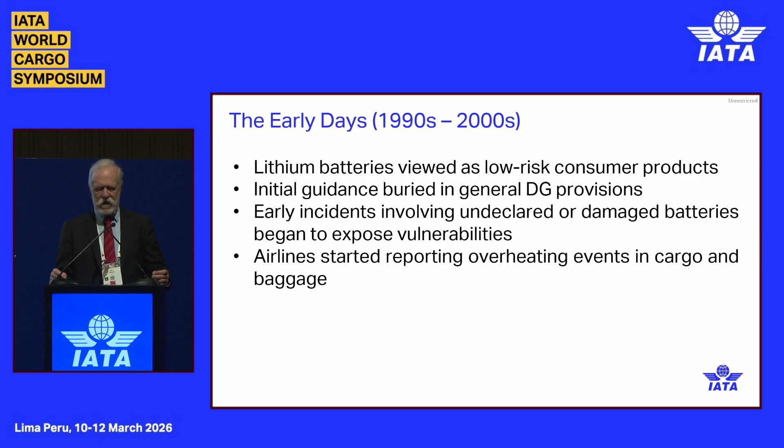But that didn't actually apply to batteries at that stage. 2003 was when we saw the UN 38.3 series of tests actually start coming in, and then we had 3 incidents in 2006.

So the first one was the UPS incident in Philadelphia, and I might take a little bit of revenge on Tim and ask him, when did he actually get involved with dangerous goods?

Good question. I was actually moved to the department, and I could not spell DG. I didn't even know that we moved hazmat, which we call that in the United States. And it was 3 weeks exactly before that incident in Philadelphia. I sat there and I was like, what have I done? So yeah, 3 weeks before that was my indoctrination into dangerous goods and batteries.

The story of that particular incident was the crew were airborne, coming up towards descent, and the flight engineer noticed there was a bit of a burning smell. That was the first indication. There was no fire warning, no smoke alert, just the crew smelt something burning. A few minutes later more of them started noticing it, so they pulled out the emergency codes, managed to land the aircraft, pulled up to the gate, evacuated, and fortunately they survived. But time from start of the fire to loss of the airframe was 23 minutes.

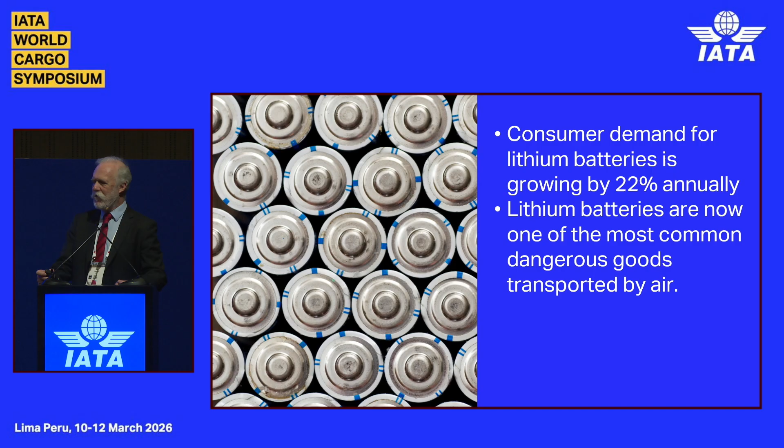Here's a few examples. And the first thing I'll say is, I'm not Trevor. I stepped into this at the last minute. Part of me stepping in at the last minute was I was actually hiking in the hills and had no reception, so I do have to thank my colleagues for putting the deck together for me.

But enough of the problems. I said I would talk about my first incident, and my first incident was one of these. Dave Brennan was actually working for the airline at the time that had the incident. So, small world.

1996. It was a delivery van, so the batteries had already flown from Perth to Sydney in Australia, put into the back of a van. The driver was taking them out to be delivered, and the back of the van started smoking.

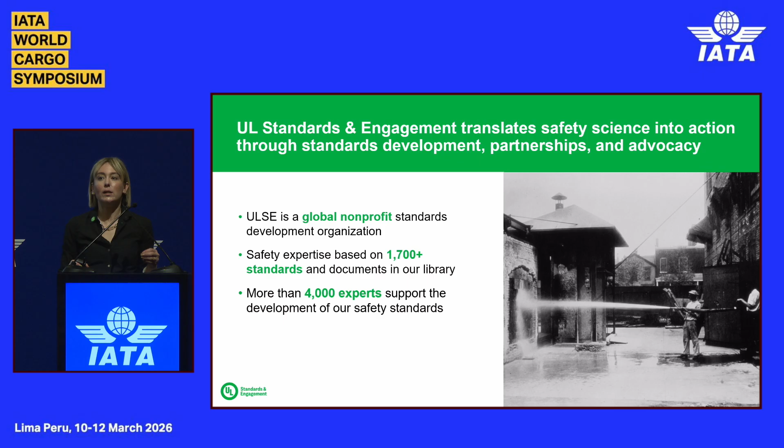So in order to investigate this issue more thoroughly, we took a mixed methods approach where we combined our TRIP incident data over the last 5 years with multiple touch points with those in the cargo aviation industry. This includes numerous operators, international regulators, representatives from the battery manufacturer industry, as well as shippers, where I think a lot of the risk is situated.

We tried to speak with both large-scale shippers as well as down to the individual drop shipper to get a sense of their understanding of batteries as a dangerous good. We also do tracking surveys on general public understanding of this risk, and we've incorporated some of that data into our report as well.

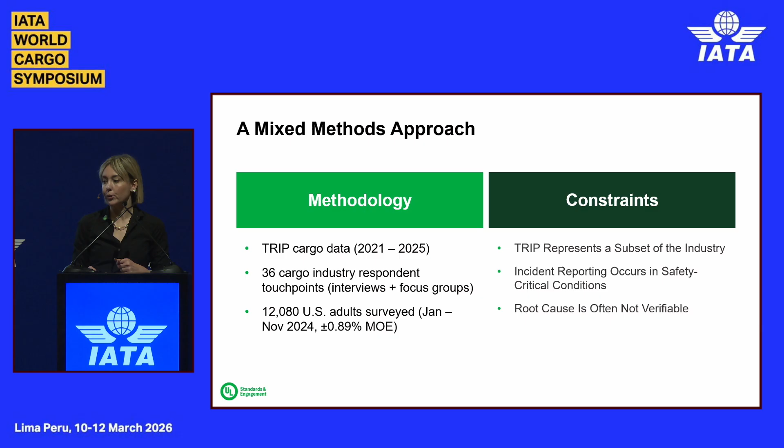There are 4 key takeaways I want to walk you through today. First, thermal runaway incidents in cargo continue to rise alongside rising consumer demand for battery-powered products. Second, battery quality and shipper behavior are the core drivers of risk within the supply chain. Third, geographic variation in oversight and approaches can add to this risk, a theme I've heard pretty consistently across this conference. And finally, the system is built on trust, but also on plausible deniability, meaning there's a lot of shifting accountability and responsibility for this risk.

Now, I'm going to walk you through each of these findings in a little more depth, and then end with a set of recommendations that I'd love to discuss as a group when we get to the questions later.

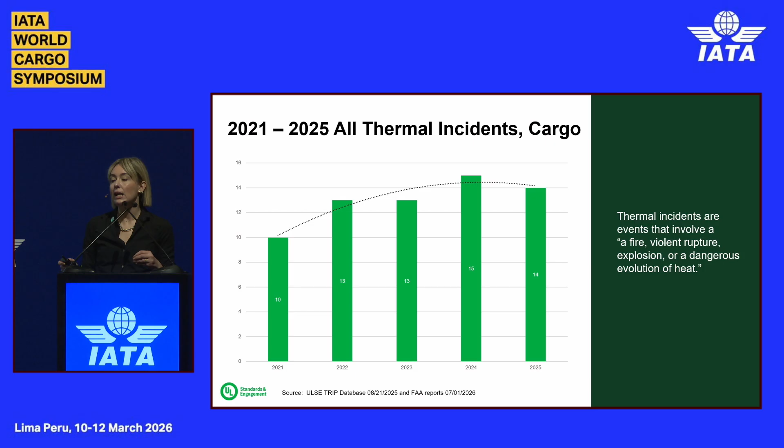Here's an overview of our cargo data from 2021 to 2025. We see broadly thermal runaway incidents are on the rise, and it's a relatively steady increase rather than episodic. This is important because we know operators are evolving their mitigations to this risk, and yet the risk is still rising. We think this is likely due to some underlying structural factors related to consumer behavior, which I'm going to talk about in a moment.

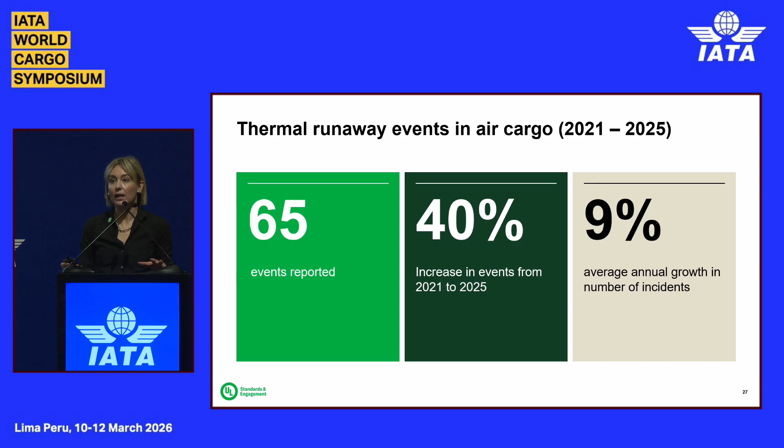First, I wanted to dig into this data a little more. We see there are 65 events reported between 2021 and 2025, with a 40% increase over that period, and a 9% average annual growth rate in incidents. To us, this is really concerning. Ben mentioned the Air Busan incident where they lost an aircraft, and we are hoping to prevent any further catastrophic events by supporting industry with this data.

So I mentioned that underlying structural factors is our hypothesis for why risk is continuing to increase, even though airlines are attending very strongly to this risk.

We see that there is rapidly growing consumer demand for battery-powered products. There's a proliferation of third parties across the board, including new manufacturers who are deviating from the larger scale manufacturing we see in larger brands, as well as freight forwarders and others moving these batteries through the supply chain.

More importantly, we see the rise of small sellers and shippers who are really unaware of the risk of this dangerous good. They're able to do this largely through e-commerce, through drop shipping, through opening small e-commerce shops, sourcing supplies around the world, and then shipping them to the consumer with very little knowledge in a lot of cases of what is actually the risk of this product.

Finally, because this is such a consumer-driven product, potentially in contrast to other dangerous goods, there are some cost compression factors across the supply chain. Particularly with these new entrants into the battery marketplace, we see people wanting to get things to customers as cheaply and as quickly as possible, and that can introduce risk when you have such a volatile product.

Now I want to talk about what we see as the core drivers of risk and where they're situated in the supply chain. When we talk to stakeholders across the board, regardless of what perspective they held, whether a battery manufacturer, a regulator, or an operator, they consistently identified two core drivers of risk.

The first is battery quality. And when I mean battery quality, I'm talking about everything from how the battery is manufactured, to the conditions in which it's manufactured, the testing it undergoes, whether or not it actually conforms to an international standard—either one of ours or from another standard development organization—whether the testing laboratory is even a registered and appropriate testing laboratory, and also where the battery is in its life cycle. So with older, used batteries, we have less sense of the battery health.

Then the other side of the coin that we heard consistently was shipper behavior—the extent to which people who are moving these batteries through the supply chain are actually in compliance with the current regulations. The regulations as they stand do spell out pretty explicitly that these batteries need to be declared, labeled, marked, and packaged appropriately.

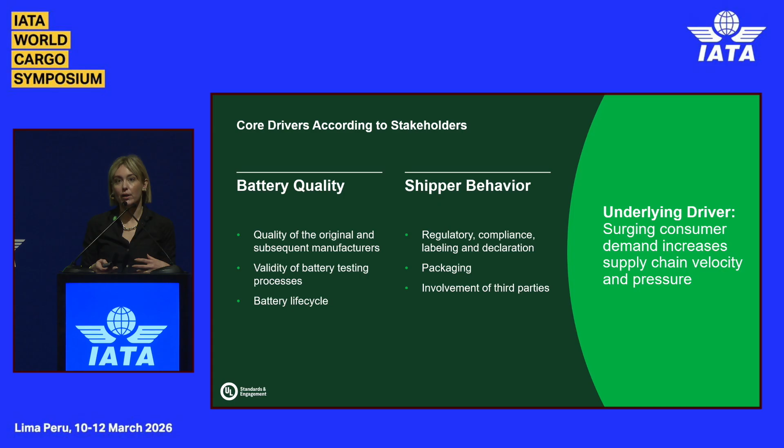But we see that shippers are operating across a very wide spectrum of compliance when it comes to these regulations. And again here, I just can't emphasize enough, this is so different from other dangerous goods in a lot of ways because of this consumer demand for the product and the entrance of all of these third parties into the supply chain.

I wanted to share two perspectives with you now—one from a regulator, one from a battery manufacturer. They're actually in agreement with each other, which did not happen often in my research. The regulator said there's a lot of trust—there always has been in dangerous goods—trust that everybody's doing what they're supposed to be doing.

But I think with these consumer products, the chances of things not being in compliance are greater than they were for things like chemicals that we traditionally shipped by air. So this regulator is again pointing out that consumer element of the issue.

I also want to put a pin in this notion of trust, and I'm going to return to that later in the conversation. We also heard from the battery manufacturer that in their perspective, consumer demand for the way that these products perform is also driving risk.

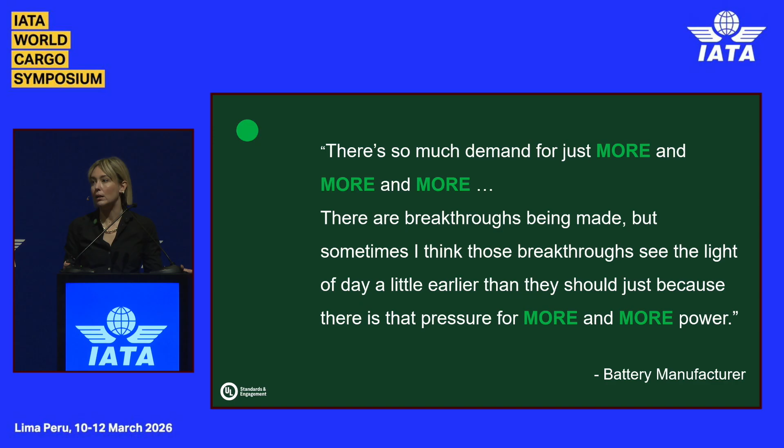They told us there's so much demand for just more and more and more. There are breakthroughs being made, but sometimes I think those breakthroughs see the light of day a little earlier than they should, just because there is that pressure for more and more power. So essentially, consumers want products that charge quickly, that last longer, that have more power, and manufacturers are trying to meet that demand, but not necessarily within the structure of standards and regulations.

So in the ideal state of the air cargo transportation process flow for lithium-ion batteries, we would have a pretty straightforward journey from the OEM to the end user. That would allow for opportunity for significant oversight that the OEM and any subsequent shippers are complying with all international regulations. It would also provide assurance to the end user that the product they're getting from across the world is going to be safe to have in their home or community.

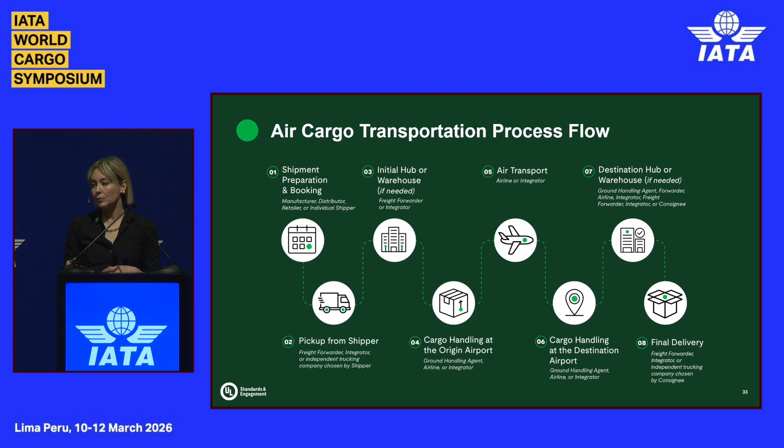That's actually not what is happening with lithium-ion batteries. It's really more like a pinball machine, I would say. They're just pinballing around the world, going from OEM to additional manufacturers to various distributors, through e-commerce sites to the consumers. A lot of times they're going back in the other direction too, when consumers are returning batteries, refurbishing them, and any number of other reasons.

So each of these lines with the arrows going in either direction represent the actual supply chain potentially, but we see that there's an opportunity to introduce risk at every point in the supply chain when it comes down to the quality of the battery, but also how the shipper has prepared that battery for shipment.

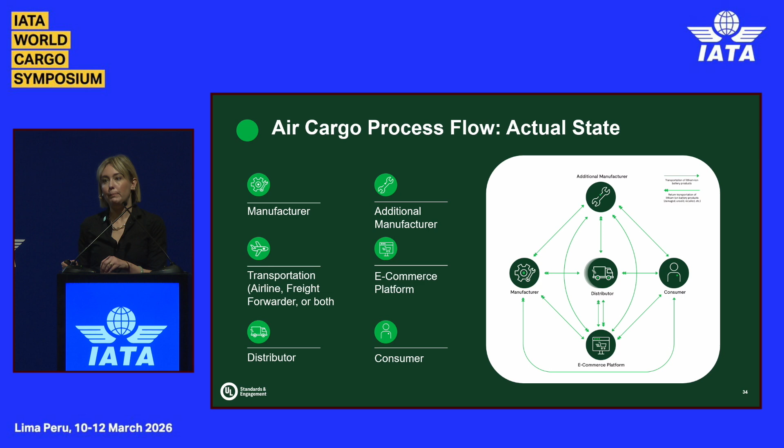We also heard very frequently that geography amplifies risk. So within TRIP we're able, when we have origin data, to track where these incidents are happening, where they are originating from the batteries themselves. We see that 42% of the incidents have origins in Asia - that's where we have the destination reported. More than half of the reported cargo incidents have their origin there. But Asia also accounts for the largest share of global volume of production of batteries, so we think the data is probably relatively normalized, although we haven't done that normalizing yet.

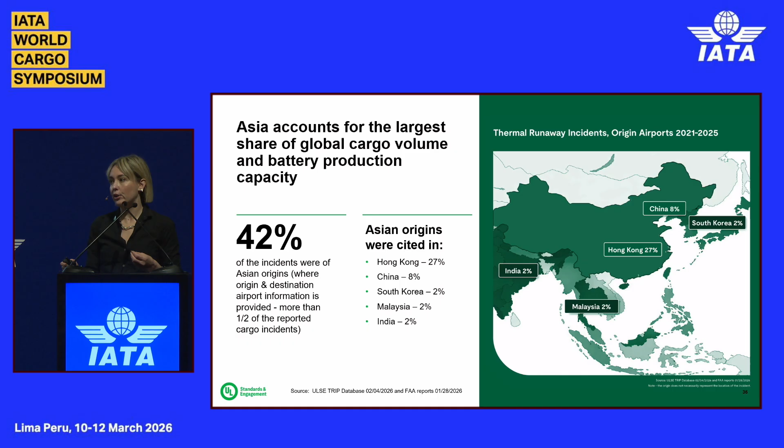So when I say that geography amplifies risk, what I'm not doing is talking about a particular state, a particular policy, or a particular approach. What I'm talking about, rather, is that the variation itself is what a lot of stakeholders perceive to be the risk driver.

Stakeholders identified three risks most frequently when I talked to them. The first was geography, the second was manufacturer credibility, so that's getting to the battery quality piece, and the third was mis- or undeclared batteries, which is getting to the shipper behavior piece.

I also was able to run correlations with how our stakeholders were talking about these risks. And we see that geography as a risk was highly correlated in their perspective with manufacturer credibility, third-party involvement, and misdeclaration. So essentially, they don't think that we're getting the same level of battery quality or declaration from all regions of the world.

We also saw that geography was correlated with some other topic areas separate from risk, in particular industry practices, oversight, enforcement, and regulations. So again here, and I think this is echoing something I've heard consistently this week, it's just differences in approach where risk is introduced rather than the approach itself.

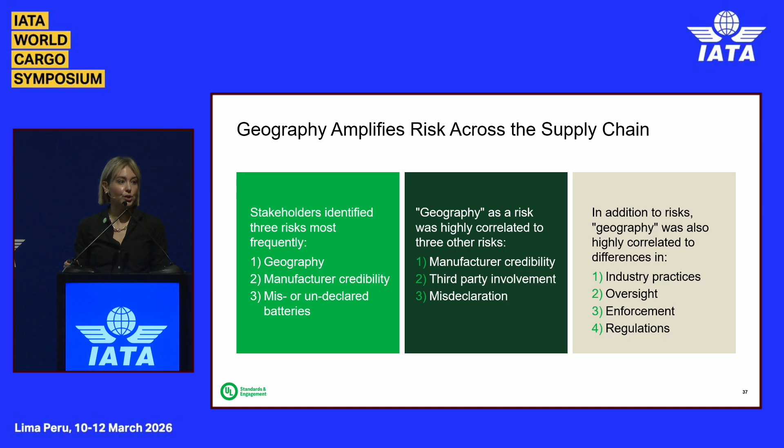The final key finding is around this idea of how the system is actually approaching oversight. So ultimately what we found is that the system relies on trust rather than verification when it comes to oversight and enforcement. In the shipping compliance and enforcement triangle, we have three key parties: regulators, operators, and shippers.

Regulators are, of course, responsible for creating the regulations and driving from the top down the way in which we can move batteries safely through the supply chain. Shippers are theoretically responsible for fully educating themselves and complying with these regulations, both in the state that they're based in as well as where they're moving the batteries to across the world.

Operators are the ones who are taking on the most risk because they are the ones actually loading these batteries onto planes. And so they are responsible for ensuring essentially that shippers are in compliance, as well as reporting non-compliance to regulators for possible enforcement.

What we heard pretty consistently across all the conversations is that there's relatively high confidence in oversight itself. I think that's due to the fact that oversight is perceived as a shared responsibility across this triangle, with no parties really feeling particularly solely responsible for it.

We heard, though, that in enforcement, there is significantly less confidence because people do not think that they're catching all of the non-compliance in the supply chain.

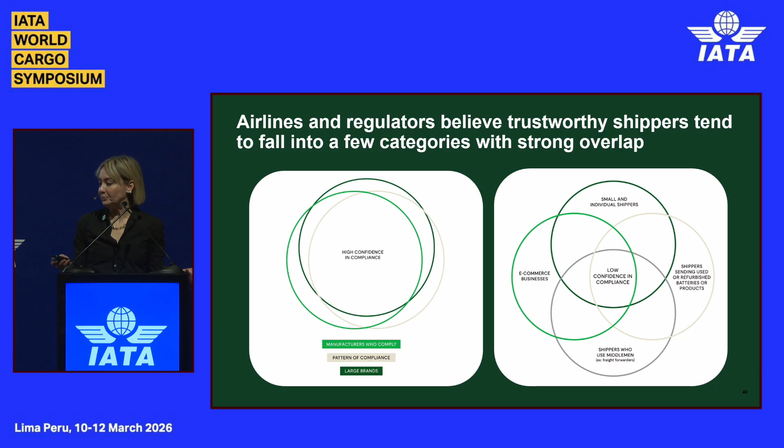On the flip side, there are four key areas that raise red flags for operators. The first is small and individual shippers, like drop shippers without a traditional dangerous goods background. The second is shippers selling through e-commerce platforms. Another is shippers using middlemen as they move product through the supply chain, creating that pinball effect of complicating the battery's journey. Finally, shippers moving used or refurbished batteries, simply because we don't know enough about the battery health.

In addition to airlines solving this problem individually around shipper surveillance, we also heard there was a lack of harmonization in other areas. Airlines told us: we know what we're doing, we're not sure what the person over there is doing, and ours is probably the best. So there's not harmonization, and not necessarily information sharing. We also heard there's not harmonization around fire containment certification approaches.

So essentially, how are we solving for this? What is the technologically safest response? We heard that there's really inconsistent training and oversight of shipper education around the globe, and inconsistencies in information sharing and best practices.

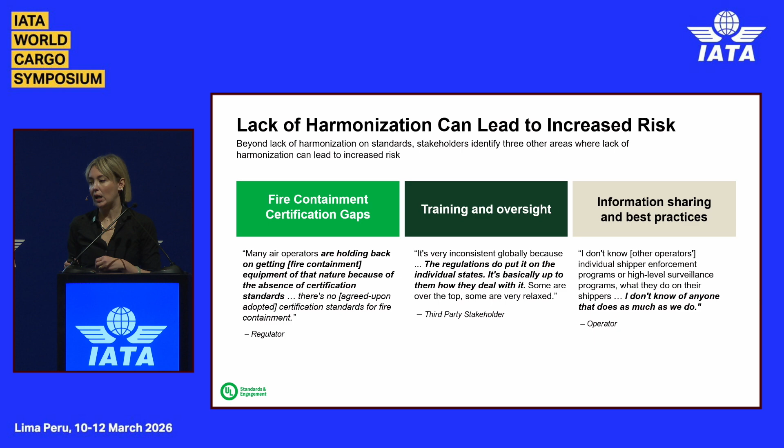As a standards development organization, we love harmonization—that's kind of our thing. So we have a number of standards, UL 1642, 2056, 2054, designed to keep these batteries safe through their entire life cycle, as they move through the supply chain and when they're with the end user in your home or community.

More recently, we've begun to develop standards for fire safety products in aviation. We have UL 5800, our standard for battery fire containment products. Many passenger airlines and some cargo operators use these for small-scale lithium-ion batteries in the cabin or flight deck. We're also now working on UL 5810, a standard for fire-resistant enclosures for lithium-ion batteries.

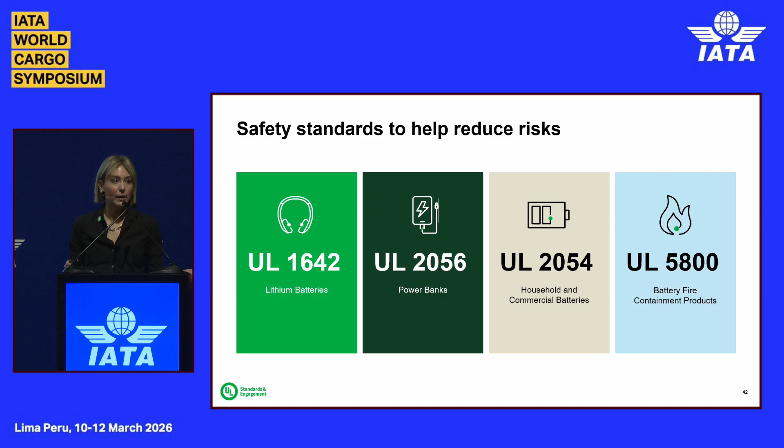I want to end with a set of recommendations that have emerged from these findings. The first is to establish clear, enforceable responsibility across the entire supply chain. This includes defining and enforcing accountability at each transfer point, reducing diffusion of responsibility across intermediaries, and attaching consistent consequences to non-compliance to eliminate plausible deniability.

I didn't have time to talk about this today, but we had some frankly frightening conversations with small US-based shippers. What we heard consistently, especially from drop shippers, was: if this package blows up, it's down to the manufacturer, it has nothing to do with me, I'm just importing it into this country. We have people importing batteries from manufacturers in Asia that arrive in compliance with regulations, then repackaging them in their own packaging that's no longer compliant because they have no idea what the regulations are. They don't think they're doing anything wrong, or that there's any responsibility for them at all.

The second recommendation is to strengthen education and global industry coordination: deliver simplified, accessible guidance tailored to small and third-party shippers, where we think a lot of this risk is situated; align oversight and inspection practices across modes and jurisdictions; and improve data sharing and visibility on shipper compliance history.

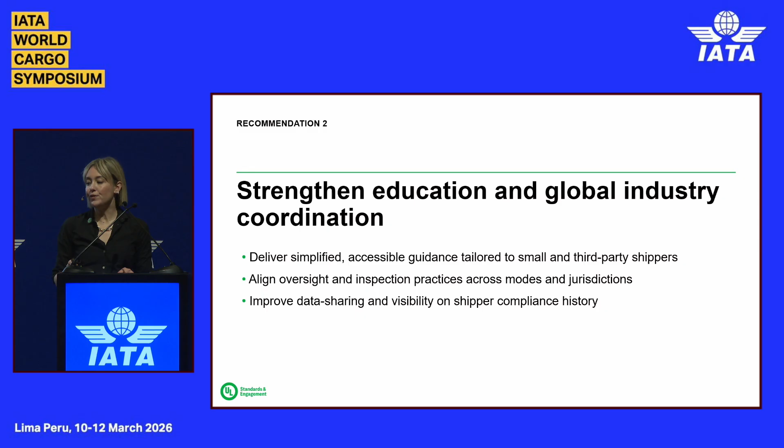Our final recommendation is to align cost and safety. What's interesting about this consumer-driven demand is that the cost and safety equation functions very differently for large brands than for small ones. Large brands see safety as highly tied to their reputation, so they often err on the side of safety at the expense of cost. On the flip side, these smaller brands are much less concerned with safety.

They're very concerned with cost because it's a highly competitive marketplace, and they want to undercut the other competitor. You can look on any e-commerce site and see the same product, probably manufactured in the same factory, being sold under multiple different names for slightly different prices, and all of those shippers are engaging in different shipping practices to get that product from its OEM to their end user.

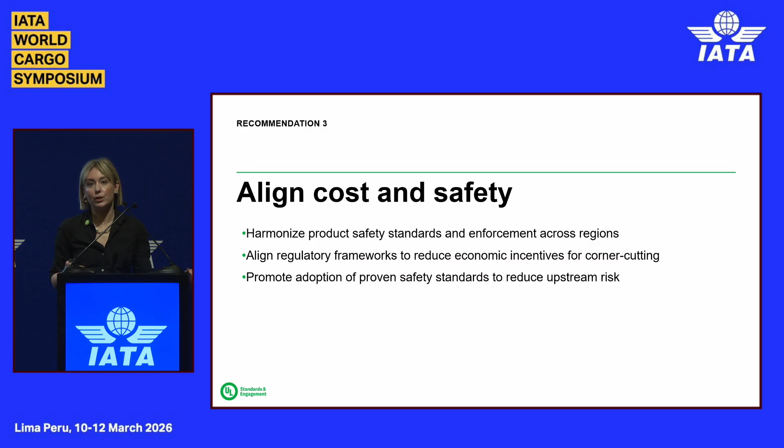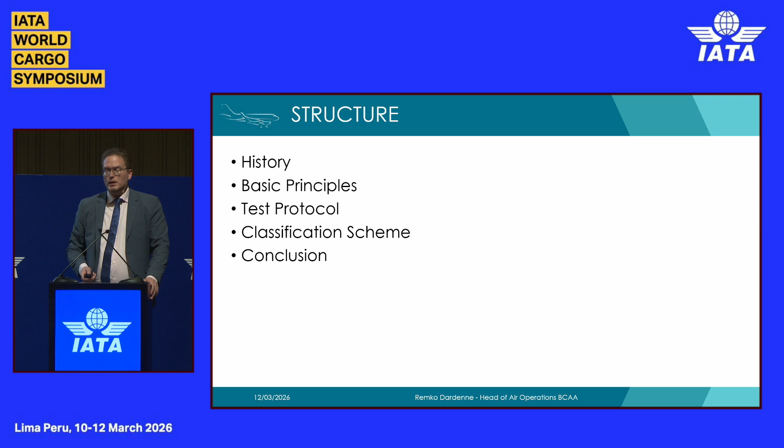Those who were yesterday at the cocktail hour in our session linked to the safety of the supply chain will have seen that I also gave a presentation on safety of the supply chain, where we discussed the definition of safety. I think it's important also to remember that all actions that Emily described, and that I will describe on new testing, are related to improving the safety of lithium batteries by air.

It might sound logical, but I think it's very important that we have this in mind, that it's not something that was invented to change something, to keep us at work, let's say. It's because incidents have occurred, and it has been seen that these new tests will probably improve safety for the transport of lithium batteries by air.

The incidents and accidents that occurred led to decisions by the ICAO Dangerous Goods Panel, or by ICAO in general, to ban certain shipments from air transport and to limit certain transports very strictly, having to have an approval or having to have more strict packaging and more strict conditions. Now, what you see on the screen are actually all the UN numbers that are linked to lithium-ion batteries, lithium metal batteries, and those contained in and packed with equipment.

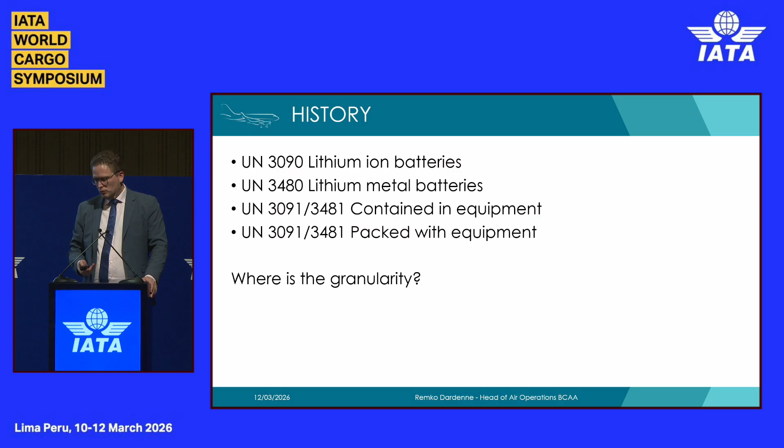Now, this was also already a request in 2016, so a long time ago, where the ICAO Dangerous Goods Panel actually requested the UN Subcommittee of Experts on the Transport of Dangerous Goods to start a working group with a mandate. You could ask the question, why is this going to the UN Subcommittee? It's because the classification of dangerous goods is done on a multimodal level, so it would not have made sense that ICAO had started it itself. It should have gone indeed to the UN Subcommittee.

So the mandate was pretty clear, but quite general: prepare a hazard-based system to classify lithium batteries for transport. And I want to note it's clearly a hazard-based system, linking it to the hazards of a particular battery. Determine the inherent hazards represented by lithium batteries and the types of reaction that may result, and also consider destructive testing.

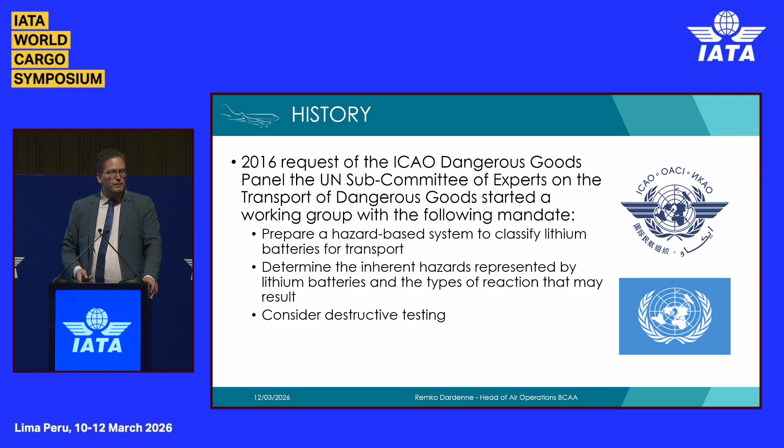Important to note, and I think that's also linked to the previous presentation, some sort of safety promotion is needed, or visibility, as it was said by somebody in the room.

It is important to note that currently there are clear requirements for the transport of lithium batteries. You cannot put any article on the market and transport it without fulfilling these requirements. So I highlighted a few of them.

The first one says it has to meet the requirements of each test of the UN Manual of Testing and Criteria, Part 3, subsection 38.3. I'll come back to that later, but Ben mentioned when this was introduced and that these tests exist.

Each battery needs to have a safety venting device or be designed to preclude a violent rupture. These are standard conditions that currently exist if you want to transport batteries. You have to have a means of preventing external short circuits, prevent dangerous reverse current flow, and then, most importantly, it has to be manufactured under a quality management program.

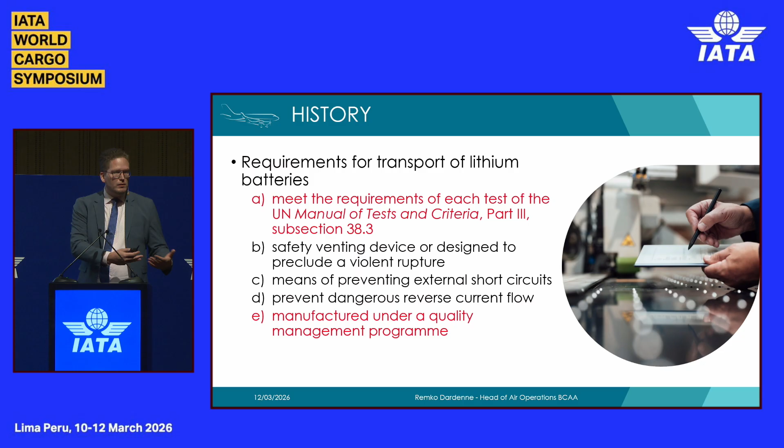If you do not fulfill these conditions, you are not transporting lithium batteries - that's how it's defined in the regulation. And of course, it must be manufactured under a quality management program. We could link this to oversight - what do regulators do to see if this quality management program actually exists?

So the 38.3 testing that already exists - I listed them here - are actually robustness tests, T1 to T8, just a code. I'll name a few: an altitude test, thermal test, shock test, a crush test, an overcharge test.

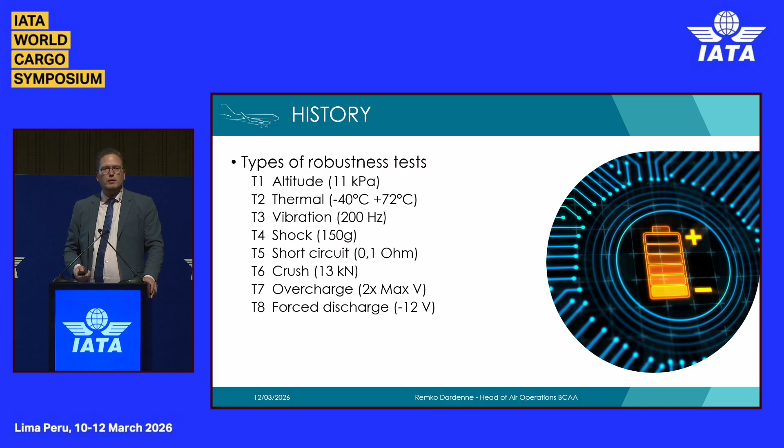These are quite severe tests that must be applied to lithium batteries before you can transport them. And to be clear, this is not only for air transport - this is needed multimodally before you transport batteries. So if anyone in the room thought there are currently no regulations or tests to be done, I hope I've convinced you this has existed for a long time in history, and if you fulfill these requirements, your batteries are considered safe for multimodal transport.

Now, going to the new classification scheme. Like I said, what was the issue? We could not make a distinction between the better batteries and the worse batteries.

Now, we all know that a reaction that occurs with lithium batteries is thermal runaway. So the idea was to look at a unique set of tests where you actually force lithium batteries into thermal runaway and see what happens, which means that if you look at the reaction, you can make a distinction between batteries that react very hard and those that do not react as much.

Another hazard is thermal runaway propagation - meaning if you have a battery that goes into thermal runaway, you put it next to another battery. And to be clear, when I say battery, it's also cells, but for ease of speaking I'll just use batteries. When you put them in a package and there is propagation, you could say that battery is less safe to transport than a battery where there's no propagation. If one battery goes into thermal runaway and it doesn't propagate to another, you could say those batteries are safer to transport.

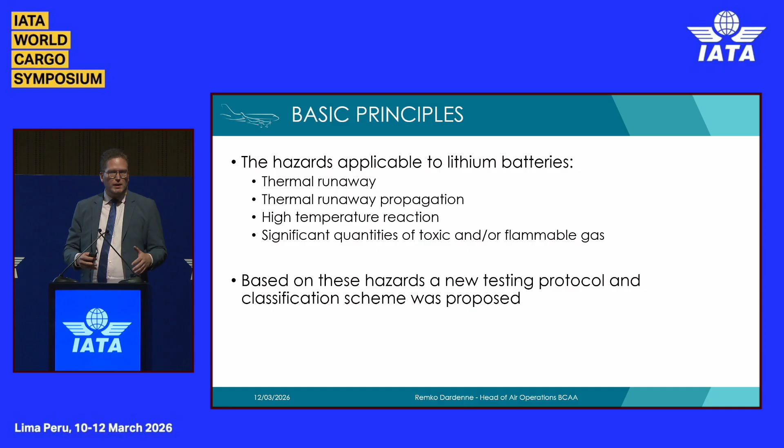Without going into too much technical detail, I'm going to describe the test protocol as briefly as possible, without all the parameters on temperature, etc. I won't talk about that because there are standard temperatures and pressures you need to have. So remember the tests I showed you, T1 to T8, the robustness tests - they still exist. We decided to name the new tests T9 and onward.

The testing based on failure is quite unique. Secondly, the tests that we saw from battery test institutes indicate what we already knew in air transport, that the state of charge has a big influence on how severe the reaction is of thermal runaway.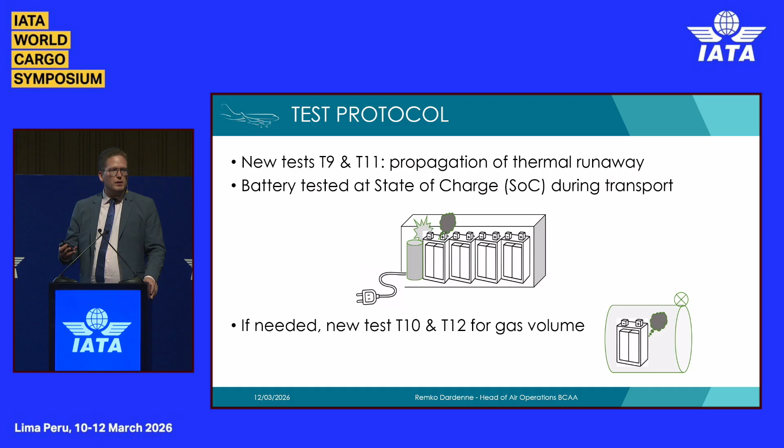The last bullet point is linked to the test for the gas volume, but I'm not going to go into detail about that. I think the first test, T9 and T11, which is for cells and for batteries, is the most important.

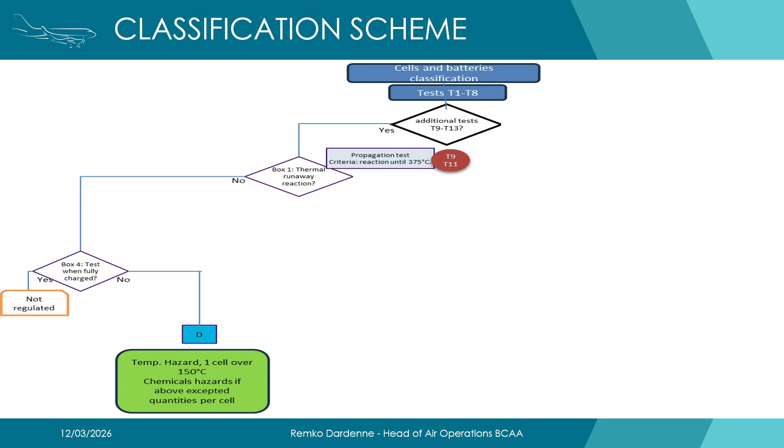What happens? You go to the box on the bottom left, and it says, have you tested your battery fully charged, so on 100% state of charge. If you did that, you applied the new test, forcing it into thermal runaway, and there was no reaction, then the working group decided that it would be a non-regulated battery because there is no hazard.

If you have tested it not on 100% state of charge, you will be seen as a battery that is less severe, has less reaction, and it will be a type D, meaning that you can apply less severe packaging for this battery.

Now, if we go to the decision box on thermal runaway, the test is being done. You see, you force the battery into thermal runaway. The next question is there propagation or not? Like I said, if there is propagation, you will end up with a type A, so the most severe battery to be transported, meaning also the most stringent packaging conditions you will have to apply.

Now, I already mentioned, if you do not have any propagation, it means that if there would be a thermal runaway, it would only be one battery in the full package that has a hazard. Then comes the flammable gas volume hazard into play, where, depending on the quantities, more than 25 liters, less than 0.25 liters, or between, you will have several types. Meaning, of course, if you have lots of volume of the flammable gas, you will be seen as a more severe battery and also have to apply more stringent conditions.

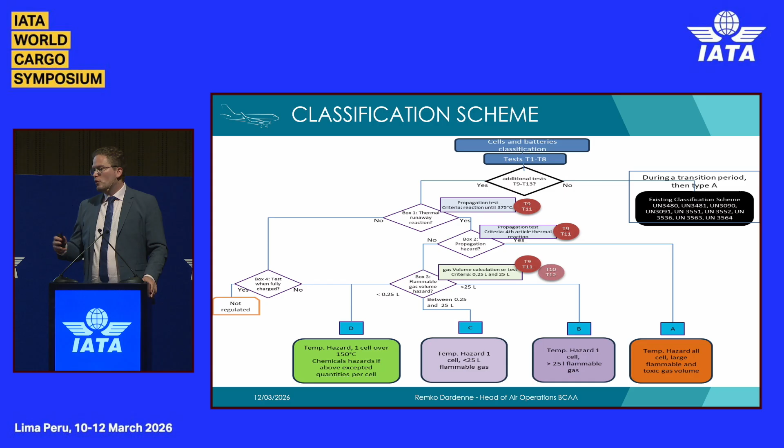And so actually, going through the scheme like this, we go back to the full scheme, and that's what I explained. So you go from the left side to a completely not regulated battery because if tested with the new tests, there is no thermal runaway, and you have tested on 100% state of charge, there is actually no risk in transport. And to the far right means if you test the battery with the new test, there is a thermal runaway, there is propagation, meaning you will have to apply more stringent packaging conditions.

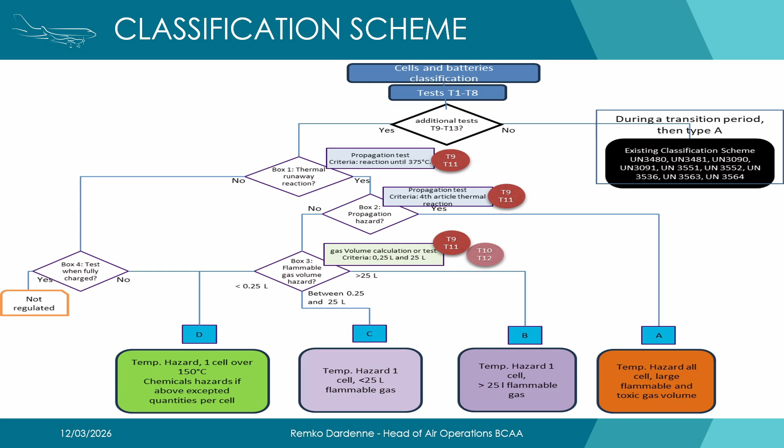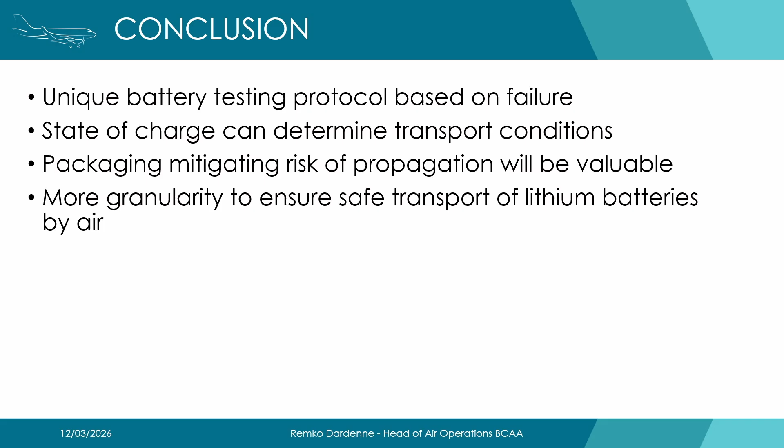It is quite a unique battery testing protocol based on failure. Secondly, the state of charge, which we already apply in air transport as a mitigating condition, is also now acknowledged on a multimodal level as a way to reduce the risk and as a way to classify your batteries as another type. And then, of course, it's part of the conclusion.

I didn't mention it in the presentation. When the new testing is actually looking at thermal runaway and propagation, if you are able to apply packaging that makes sure that you do not have propagation, you of course already eliminate a risk. So the packaging mitigation of propagation risk will be a very valuable thing. And currently, packaging manufacturers are already looking at these kinds of packagings.

And even the big battery car manufacturers already have this to ensure that if they transport their batteries in big volumes to the car manufacturer facilities, that if something goes wrong with one of those cells or batteries, not a full pallet or the full container is gone. So they already apply gaps between their cells and batteries. So this will also be a very important aspect.